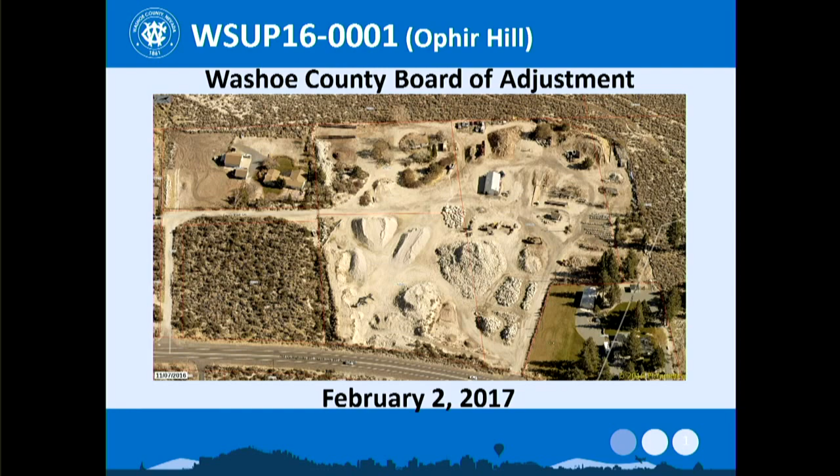It's all of that disturbed area you see there and the piles of rock. Zooming out, here's the vicinity map for the area. It's in the northwestern portion of Washoe Valley, right off of old Highway US 395.

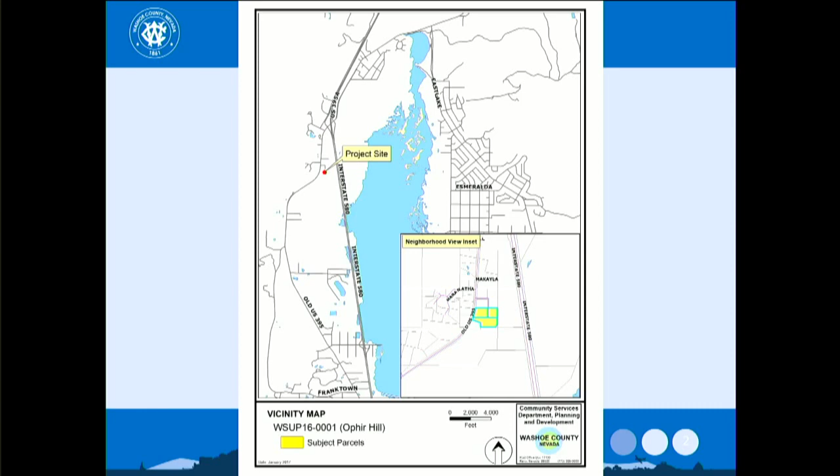For background, the subject site consists of 3 parcels totaling 11.35 acres, all of which has been disturbed. The property is zoned high-density rural and has a master plan designation of rural. All of the surrounding immediately adjacent parcels are similarly zoned, except for the large BLM open space parcel to the east, which is general rural. There are single-family residential houses to the northwest and south of the site, and the aforementioned BLM open space to the east.

In 1983, the Slide Mountain landslide deposited approximately 160,000 cubic yards of dirt and rock on the subject parcels. And since that time, for over the past 30 years, the landowners have been clearing that debris from the property through removal through commercial sale. Washoe County Code, however, classifies that type of business activity as an aggregate facility, which is an industrial use. The high-density rural regulatory zone does not allow that industrial use.

Due to a recent code complaint about the use, code enforcement took action and investigated. Apparently, there hadn't been a complaint up until this point, and the operation had been going on for some time. After investigating, enforcement staff faced 2 options in trying to bring the site into compliance. They could either demand an immediate cessation of the commercial use, which likely would have resulted in civil lawsuit proceedings, which can go on for quite some time,

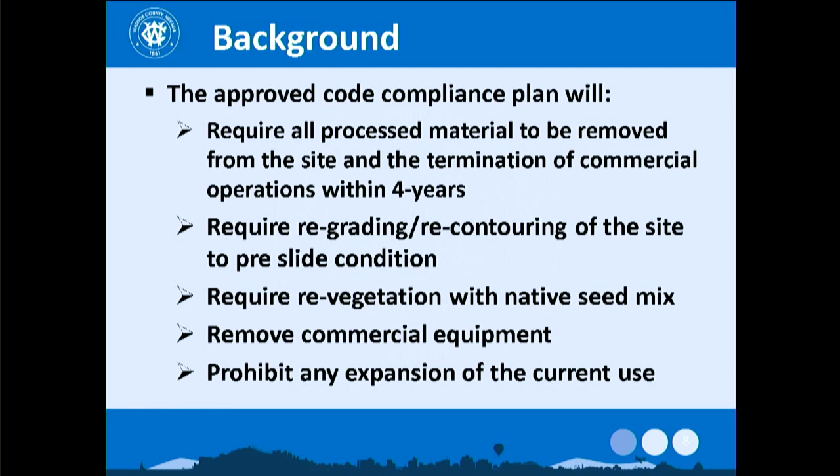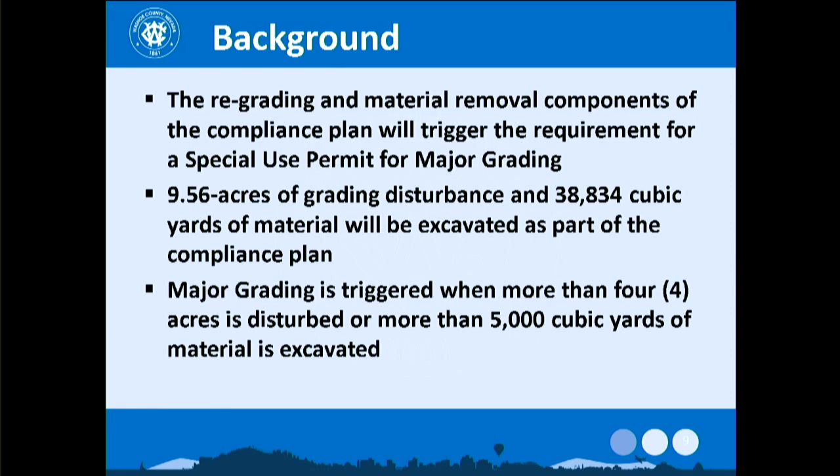So why an SUP? Well, the regrading and material removal components of the compliance plan trigger major grading because there's so much material on site. Approximately 9.56 acres of grading disturbance overall will occur, and obviously it's already been disturbed. As part of the regrading, 38,834 cubic yards of material will be excavated, as well as portions removed. Major grading is triggered when more than 4 acres is disturbed or more than 5,000 cubic yards of material is excavated, so it's well beyond those thresholds.

So just to be clear, wrapping up the background section, what the BOA is being asked to do on this item: you're being asked to approve a special use permit for major grading and approve the associated code compliance plan, which is actually going to be part of the conditions of approval to the SUP. So the plan, so to speak, are actually going to be conditions of approval to the SUP. The BOA is not being asked to approve the aggregate facility use, which is illegal. You're being asked to approve a plan to terminate that existing use through a phased compliance plan.

Here's the current condition of the site with the material estimates, just to give you an idea of the range of material that exists and will need to be removed or regraded, ranging from the small 12-inch rock and sand that they have sorted there all the way up to the 36-inch and larger diameter boulders.

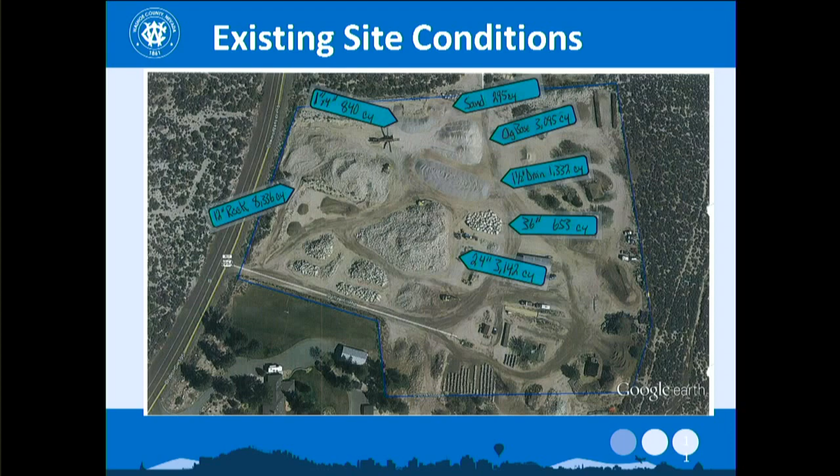So the restoration plan would essentially rebalance materials on the site and create a gradual downsloping from the highway going east across the 11-acre site. About a 30-foot elevation difference from the highway to the far eastern edge of the site, and then the large boulders will be removed through the continuing commercial operation.

Any questions so far on that site plan? Okay.

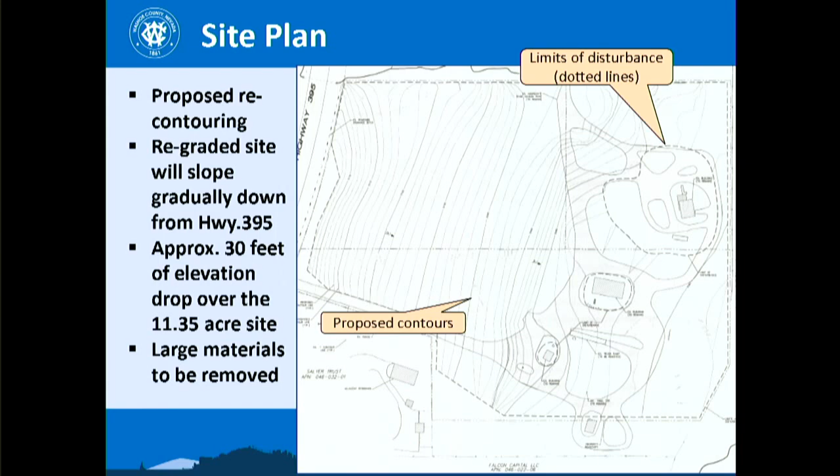As I mentioned, the conditions of approval will constitute the actual compliance plan. But the conditions of approval, as with any special use permit, will also address some fairly typical operational parameters. On a use like this, operations we generally try to limit to daylight hours, so that's going to be a condition of approval proposed by staff. No starting earlier than 6 a.m. with machinery and removal of rock. There has been crushing of rock, it's my understanding, or sorting in the past. We would like a condition prohibiting that crushing of rock as incompatible with surrounding residential use.

No subsurface or pit mining. The applicant says they don't intend to do that anyway. As I mentioned, no expansion of operations, but we're going to put that in as a condition, and then the revegetation.

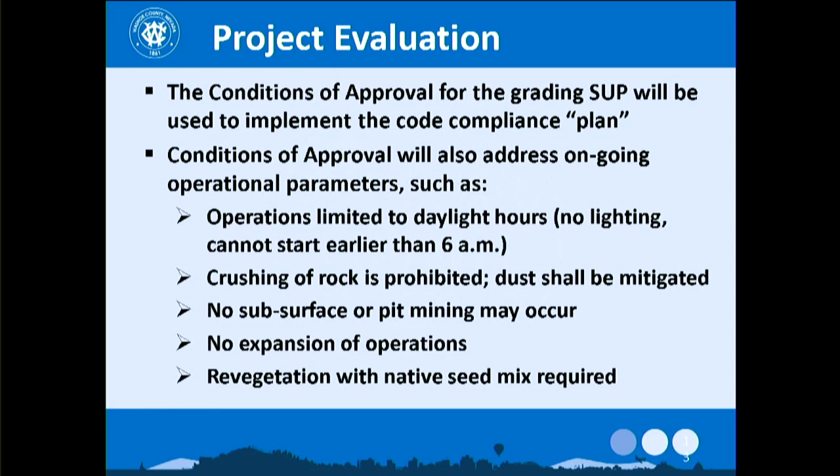A condition of approval is included that specifically states no extension of the 4-year deadline will be allowed. We don't want to get to the end of this process and have it keep getting strung out over and over again. So if we get to the end of that 4-year time frame and we haven't achieved compliance, then of course legal action will have to occur after that.

The regrading plan will actually be an ongoing process. So as materials are being removed, they will then start the regrading process at that particular location. Staff has already received the grading plans. They can be approved once, if and when this SUP is approved, then that grading permit will then be signed off on. Only materials currently present on the site will be part of this.

We wanted to make sure there's a condition in there so that the owner can't bring in materials from another site and store them and then move them. So that'll be another condition of approval. And then lastly, material loads will need to be tarped and treated for dust or loose material. That's standard practice with aggregate operations.

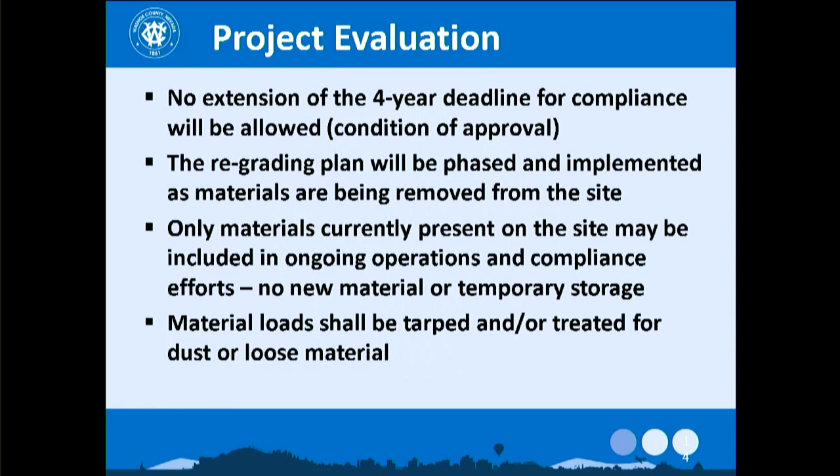Here are all the reviewing agencies staff sent the application to. We are erring on the side of caution here. This is more agencies than we normally send applications to.

Only 3 out of those 13 reviewing agencies requested conditions of approval, and they are listed there: Planning and Development, Engineering, and Health District. It's attached as Condition A, or Exhibit A, to the staff report.

The Incline Village Citizen Advisory Board does not meet during the winter, so the item did not go before them, though they were provided a copy of the application. Staff did not receive any comments from CAB members, but did receive one comment from a West Washoe Valley property owner stating that no extension of the 4-year compliance timeframe should be allowed. Staff responded that it's already a condition of approval, included as condition F2.

Here are the properties that were noticed. The 500 feet did not result in the minimum required 30 parcels, so staff went beyond that 500 feet and tried to select parcels that had houses on them in lieu of vacant property, and you see the extent of the noticing there.

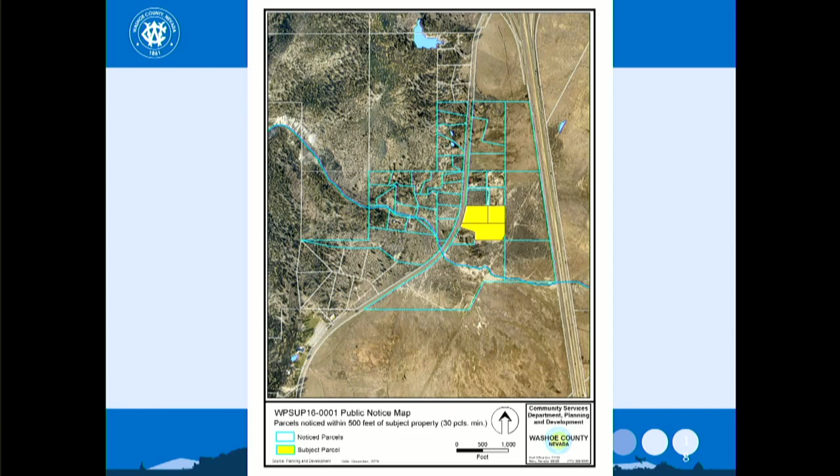The board is required to make certain findings for the approval of special use permits. They're listed there: consistency with the master plan, adequate improvements, site suitability, that it's not detrimental, and effect on a military installation. Analysis of the findings is provided in the staff report starting on page 11, and staff feels all of the findings can be made.

Staff recommendation is for approval with conditions, and here's a motion for consideration. That'll open up to any questions.

Thank you, Mr. Giesinger. I still have to get used to these mics, they're a little different. Anyone have any questions for Mr. Giesinger from the board? Well, he's up there. Nothing, okay. Thank you, Mr. Giesinger. Does the applicant wish to speak?

Good afternoon, my name is Linda Burdick. My husband and I are the owners of these parcels, and I would like to share with you a short PowerPoint presentation that will illustrate the conditions before, and hopefully we can remediate that.

Maybe, help. Chad, can you see if you can give her a hand figuring out what's going on there? There we go, okay, no that's not me, not on the front, wrong one. Just a minute, she has to bring up the right PowerPoint, and then when you do that she'll be able to click the device, so just give her a moment. Staff's actually doing it right there, just a moment. Oh, gotta load it, yeah just wait. Don't let me get too anxious. I apologize if any of you had to live through this horrible event, and it's reminding you of it again. It was quite an event. None of you look old enough to have lived through it, however. 1983? That wasn't a joke at all.

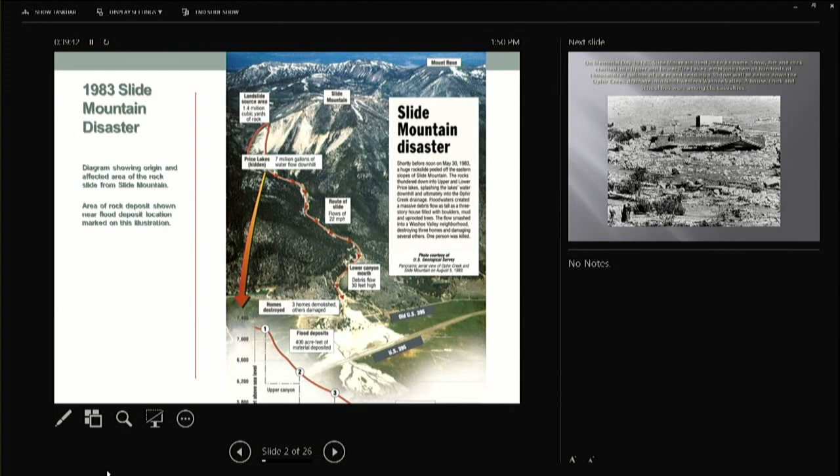This is basically my cover, an overview of the slide where it initiated up at the top of Slide Mountain. I have a little pointer here. The property in question is right down here at the bottom, where the majority of the material actually ended up on our parcels.

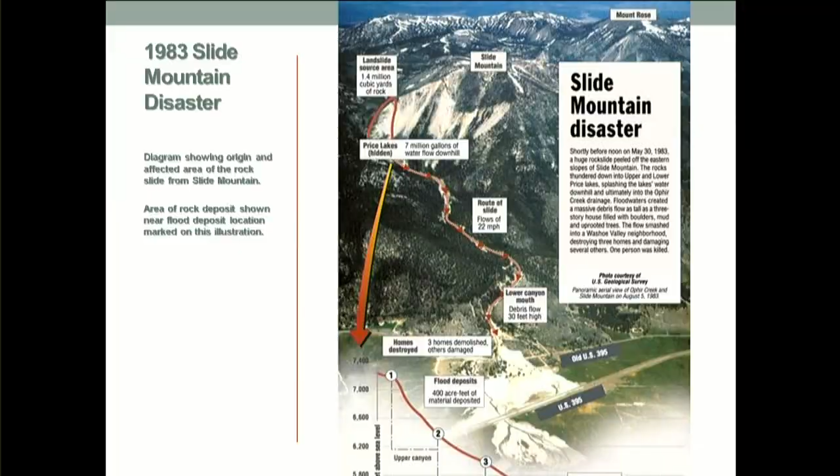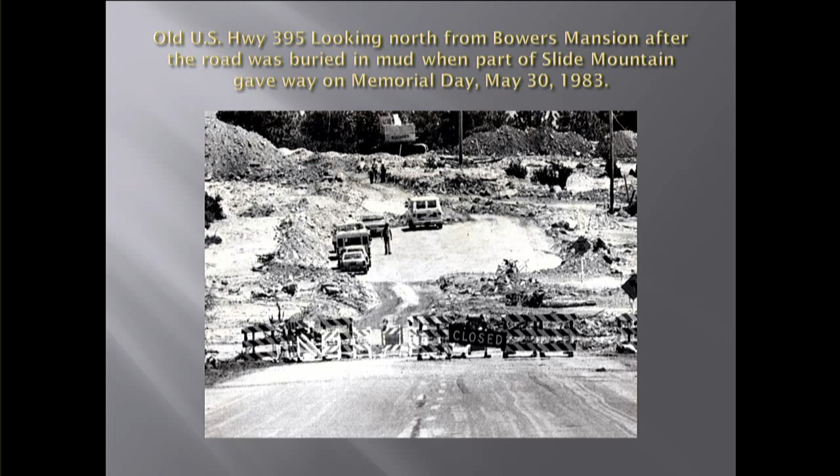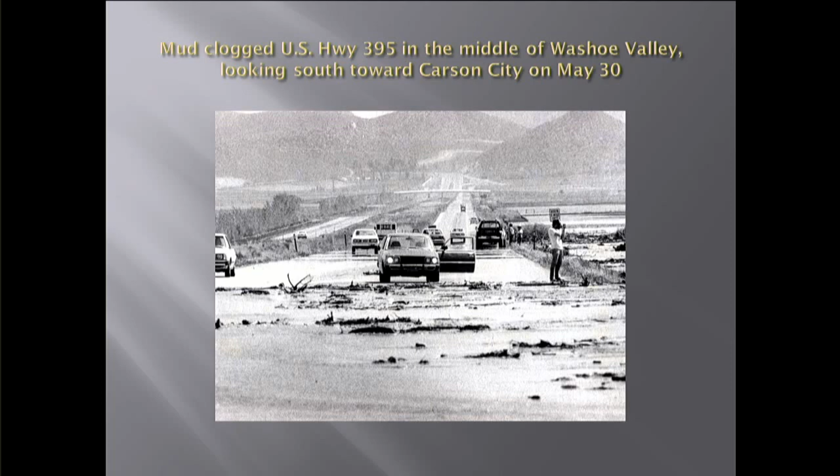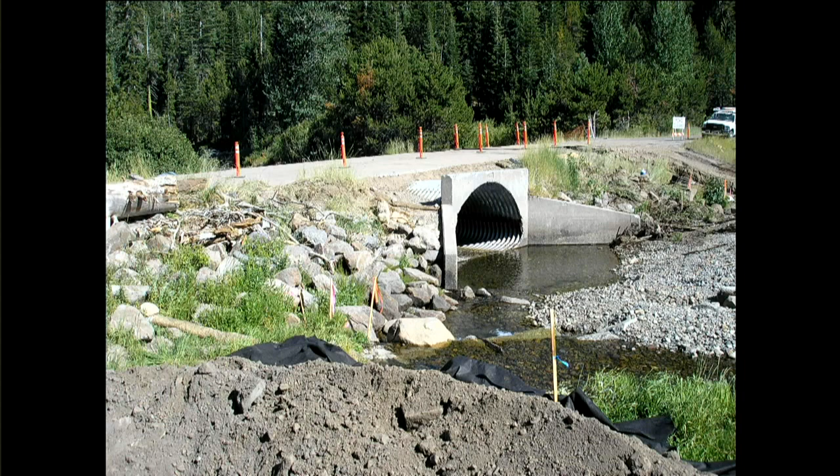And the product has been utilized very effectively with the TRPA in the Tahoe Basin. Last fall, they gave out 9 awards for excellence with environmental projects in the Tahoe Basin, and we got 4 of them. So the rock is being well used for environmental purposes. And I thank you very much for watching.

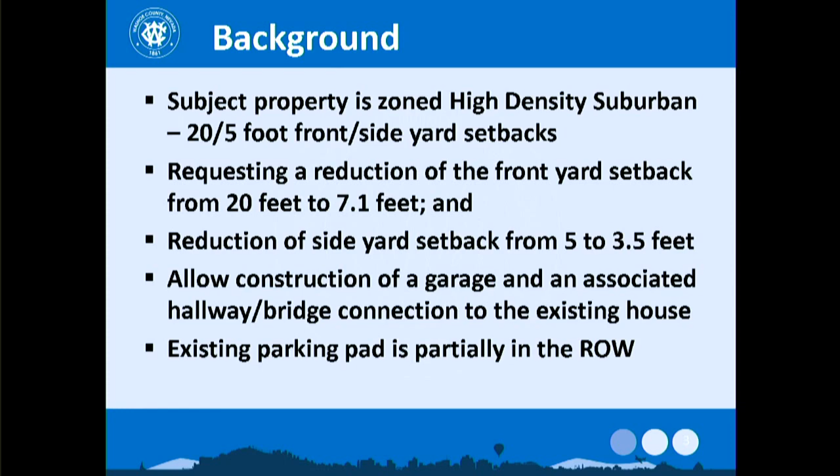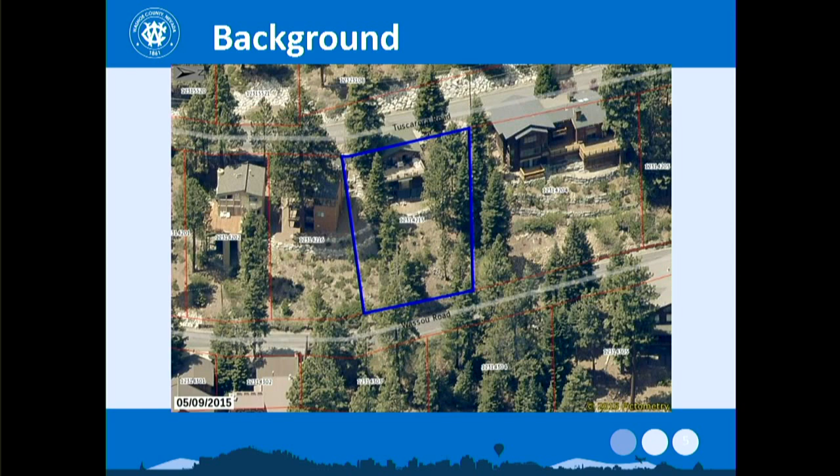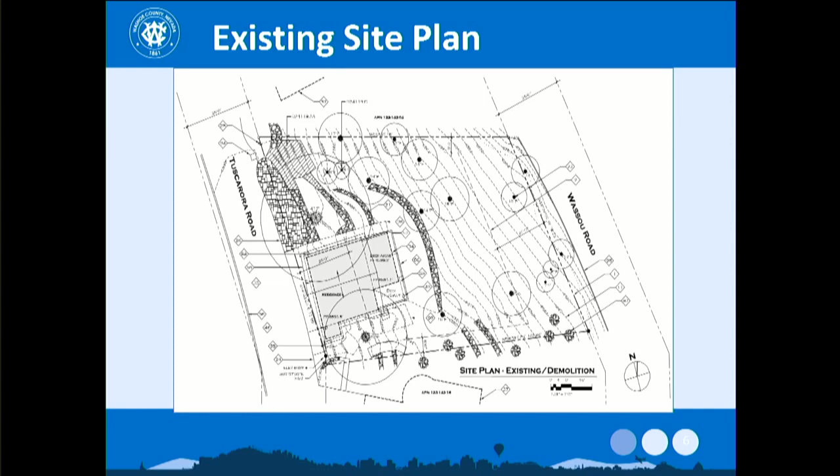This is the existing site plan showing the house footprint, and you can see the pavers there, how they encroach into Tuscarora Road a little ways, and then those rockery walls.

And this is the plan to add the garage. The red outline is the actual setback envelope, and the yellow line is the existing house, which is already within the front yard setback and very close to the road. The brown outline is the proposed garage addition.

And then you may see there, in between the garage and the house, there's a very large diameter pine tree, over 43 inches in diameter, which they're trying to maintain and build around.

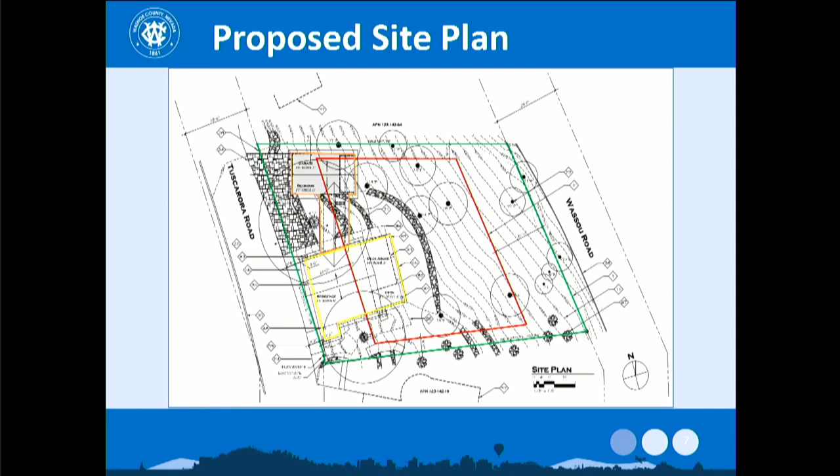Here's elevations of what the finished construction would look like. There's the aforementioned tree and the garage, and then the hallway connection. On the bottom is the back elevation.

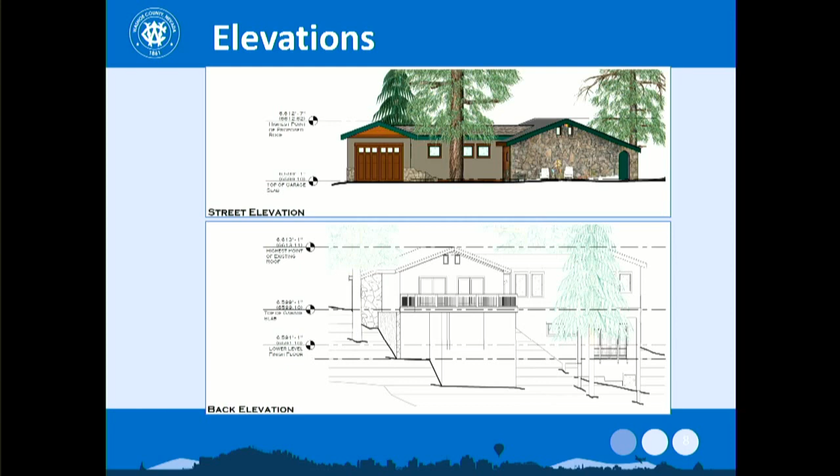Here's your side elevations. You can see the nature of the slope there and the step-down building approach.

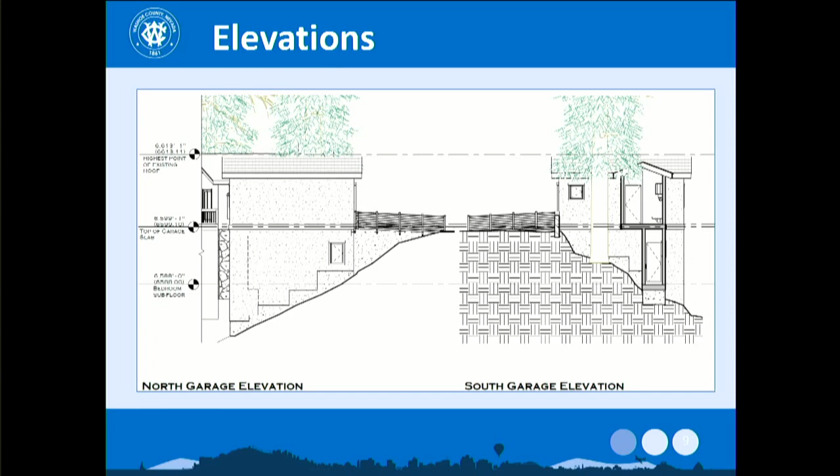In terms of the surrounding parcels, this one is actually a little bit wider than some of the ones further down Tuscarora, so it isn't exceptionally narrow, but it is extremely steep, as you were seeing in some of those elevations and in the pictures.

As I mentioned, the existing residence, built in 1966, is already well within the front yard setback, approximately 2 feet from the property line at its closest point. There is no garage. Obviously, on-street parking is very limited along Tuscarora, especially now with all the snow.

And most of the houses on this street, especially on the downsloping side, are built within the front yard setback up to street level.

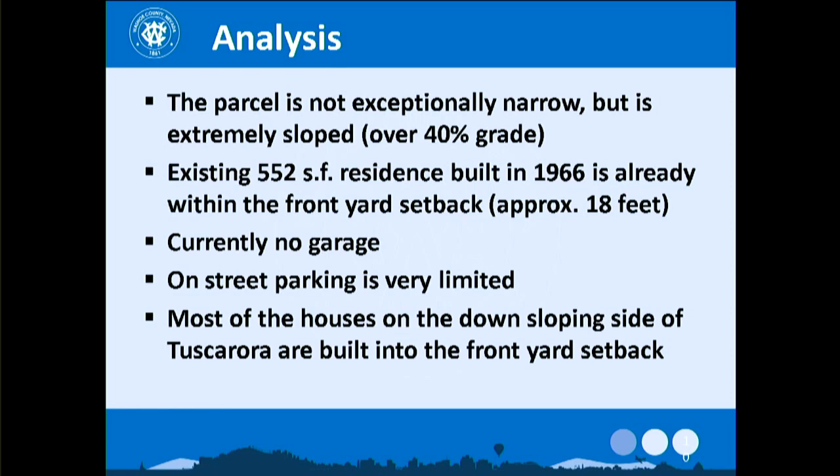Staff feels special circumstances do exist on this site due to the topography and some very large trees.

Staff feels approval would not represent a detriment to the public good. Upslope property views would actually be a little bit better with this design than if they met the 20-foot setback, since they'd have to build farther back down the hill. And of course, it would also provide additional off-street parking were it approved.

Staff feels there's no grant of special privileges. As mentioned, there are similar adjacent properties with setback relief up and down Tuscarora, as well as the existing house inside the setback. The proposed use is an authorized use, as an accessory to the main dwelling. And a military installation is not affected, so it's not mentioned here.

Here are the reviewing agencies staff sent the application to, the standard agencies for Tahoe. 3 out of 7 agencies responded: planning and development with conditions of approval, land development, and engineering. Those conditions are contained in Exhibit A of your staff report.

I want to apologize, during my last presentation I got my cases mixed up. As Mr. Stanley mentioned, yes, the Southwest Truckee Meadows CAB did review the previous application and approved it unanimously. This application, Incline Village, Crystal Bay CAB, does not meet in the winter, so they did not review it, and I did not receive any comments from the CAB.

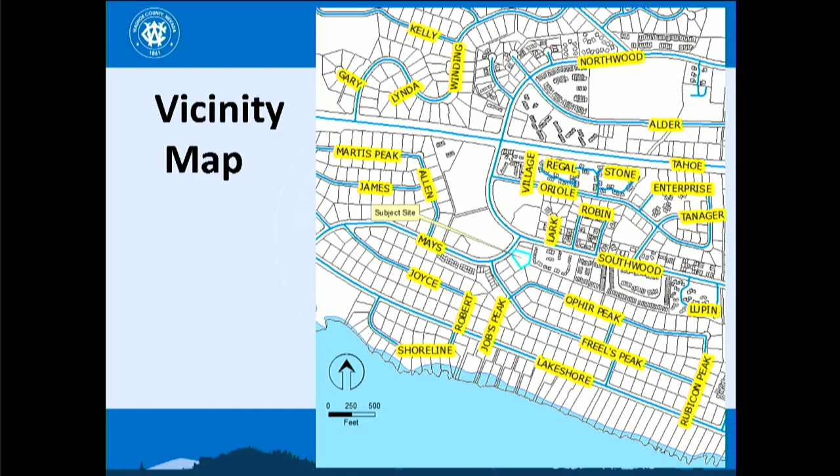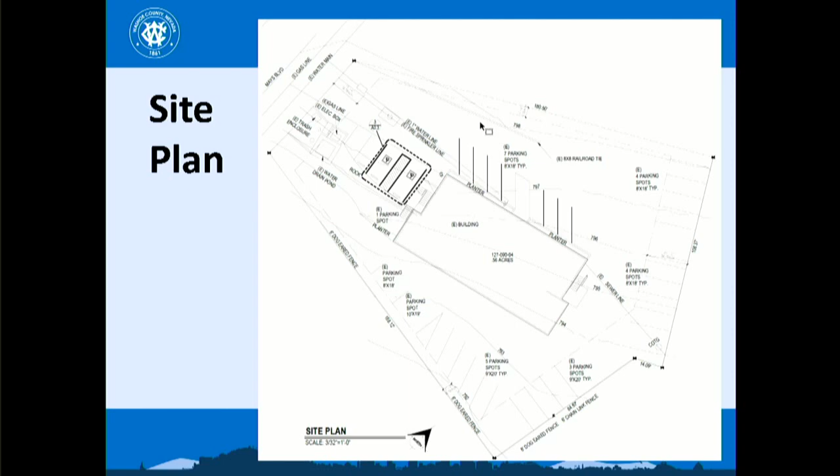This is located on Mays in the Incline Village area, as can be seen on the vicinity map here. Next slide, please. This is a site plan showing the existing configuration of the building on the parcel itself with the surrounding parking. Next slide, please.

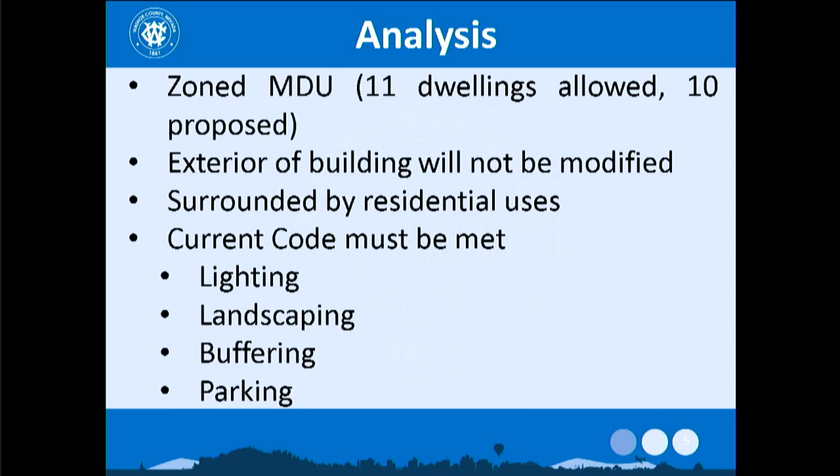The use is an allowed one. This is in the medium density urban zone, which is actually, generally speaking, a residential zone. The exterior of the building will remain more or less as it is. It is surrounded essentially by other residential uses. So really this is a pretty simple one, and I think all of my comments and analysis can be summed up in: okay, meet code. Because this is a change, current code will come into play for things like screening around it, lighting, landscaping, covered parking for those apartments. But really there's not a whole lot else there.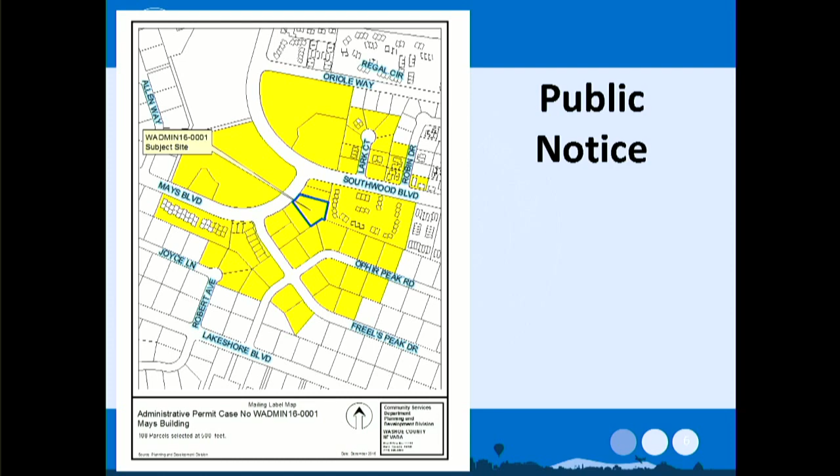Next slide, please. This was noticed to the surrounding property owners as shown on the public notice map here. Next slide, please. And again, the conditions are really minimal, and an approval would then require a set of building permits, and those building permits would be reviewed for compliance with all of the current applicable codes. Next slide, please.

As far as the findings go, is the proposed use consistent? Yes. Apartments are allowed in the medium-density urban zone. Next slide, please.

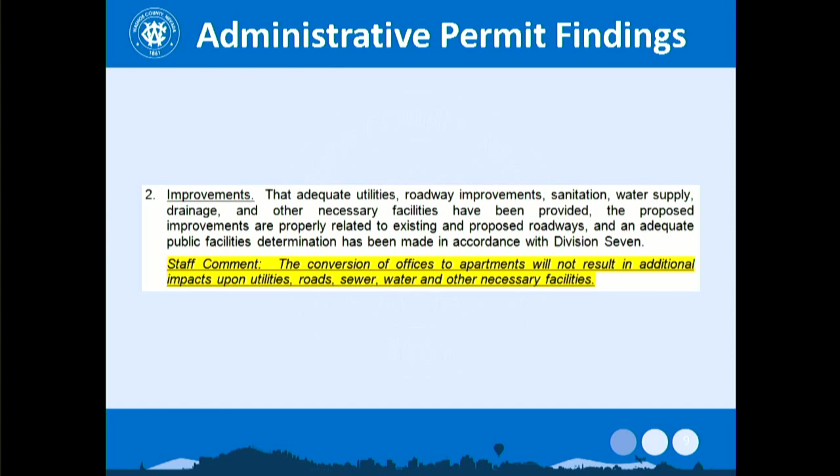The conversion from commercial offices to residential apartments will not create additional impacts. If anything, the overall impact would be a little less. The site is suitable because the building is already there, parking is already there, and upgrades will be made to meet current code.

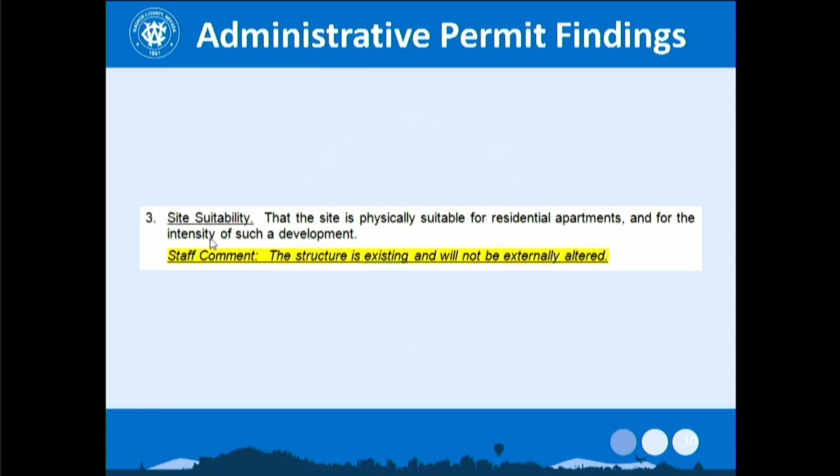Regarding the finding of not being detrimental, this was sent out to the appropriate reviewing agencies, and I got virtually no comment back from any of them. And there is no military installation in the vicinity, so this finding does not need to be made.

So, without having much in the way of comments from anyone, I am recommending approval, subject to the conditions. And I hate to sound like a broken record, but they must come up and meet current code when the building permits are applied.

Thank you, Mr. Pelham. Does anyone have any questions for Roger? Seeing none, thank you. Madam Secretary, does the applicant wish to speak? Yes, sir.

Mr. Chair, members of the board, Tim Carlson for the record. I'm the owner of the property, and we concur with staff. We'll do everything appropriately assigned to us regarding the permits and so forth, and do it according to code. I have no other further comments unless there are questions.

Thank you. Does anyone have any questions? Seeing none, thank you. Madam Secretary, do we have any public comment? Yes, we do. Kathy Brandhorst. My name is Kathy Brandhorst, and I am the United States President.

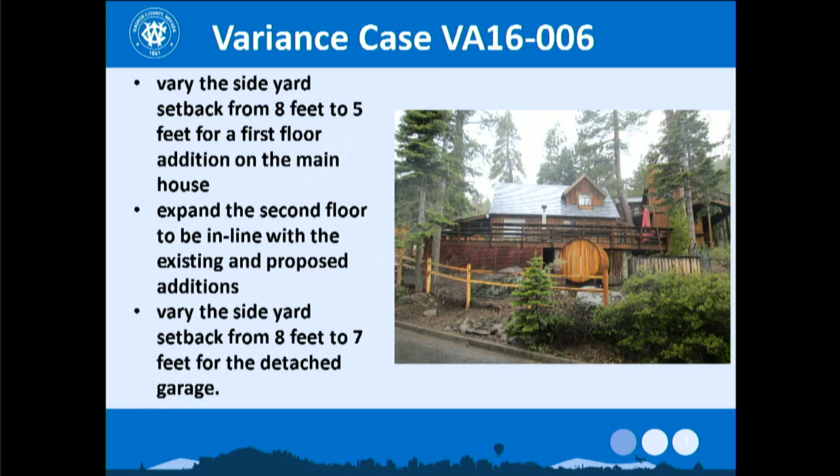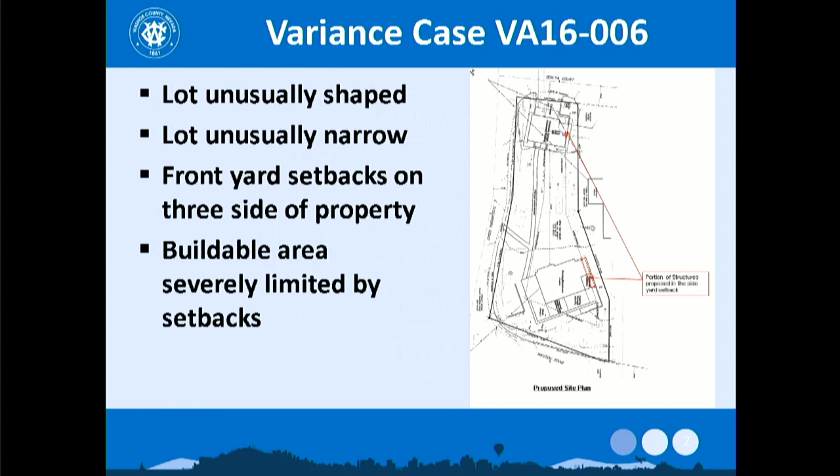Okay, so the conditions of the lot haven't changed. It is an unusual shaped lot, a very narrow lot. It has 3 front yard setbacks, and that severely limits the buildable area of this property. This is not a tear down rebuild or a major overhaul, it's a matter of modifying the small cabin a little bit to make it a little bit more livable.

So in 1999, they actually had a variance to reduce the side yard from 8 feet to 5 feet so they could put a standard size bathroom on it.

The cabin only had this little bitty bathroom. That's a picture of it there. I equate it to something you would find on an airline. It's really small and cozy, let's put it that way.

So they did in 1999 add a standard size bathroom. Standard size means 8'11" by 6'6" on the outside walls, so approximately a 9x6 bathroom. It's still pretty small. The second bathroom they want to add would be about the same size, but then they would take out this little tiny bathroom and actually have a little more room in the kitchen, which would be nice.

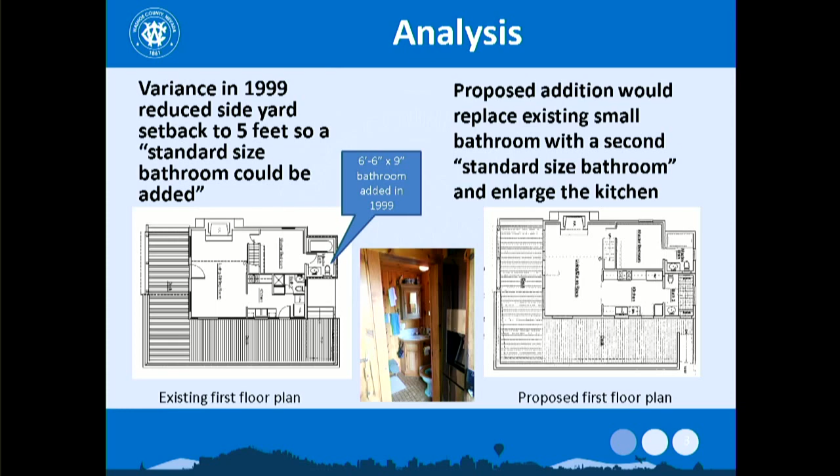Oops, got my buttons backwards. Okay, this is the existing elevation on the right side, and you can see that little bump out on the side of the house. That was the addition they put on in 1999. They want to now put an addition on the first floor that would be even with that, and then extend the second floor out to be even with the first floor with the additions on it.

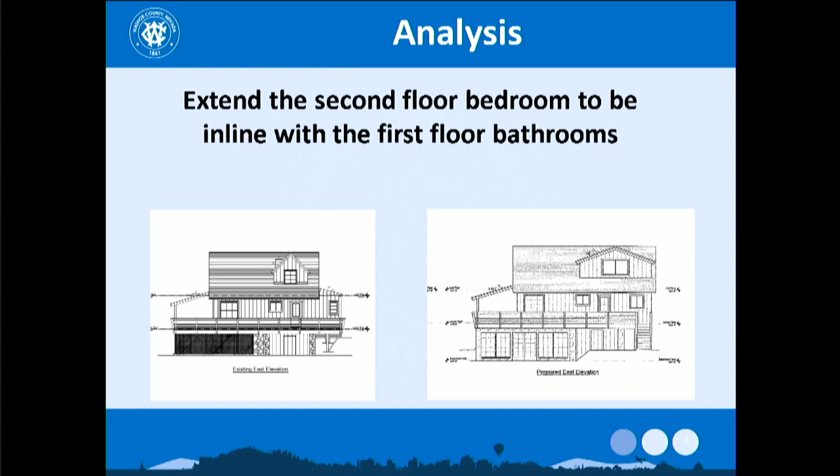Basically, by code, the side yard setback starts at the rear of the front yard setback. So I was trying to figure out how to word this, and it really is confusing when you just say it. That's why I had to make a picture.

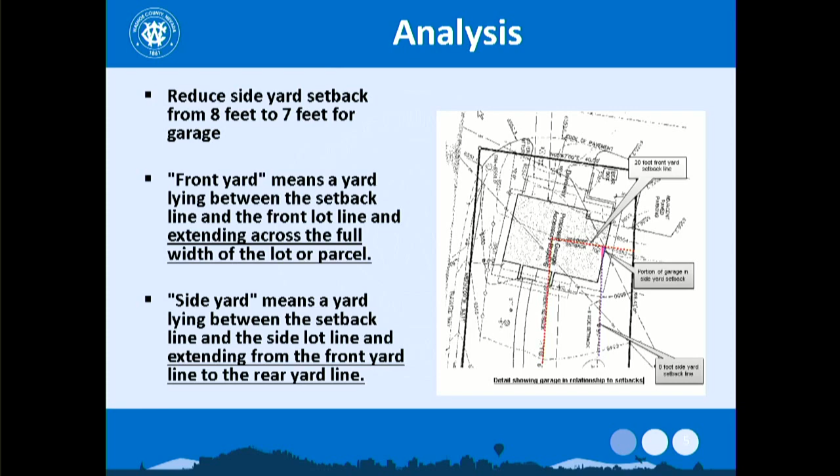Okay, so the conditions of approval are still the same. The substantial conformance, and there will be a hold harmless on the house as well as the garage, because the house is also in the front yard setbacks. The porch is already there in the front yard setback, but we want to record that, so if there's any damage on it. There's also a condition that if more than 50% of the cabin is torn down for remodel, they can't then go back and say we're going to build this new house on top of the old footprint. That would have to look at the existing setbacks on it.

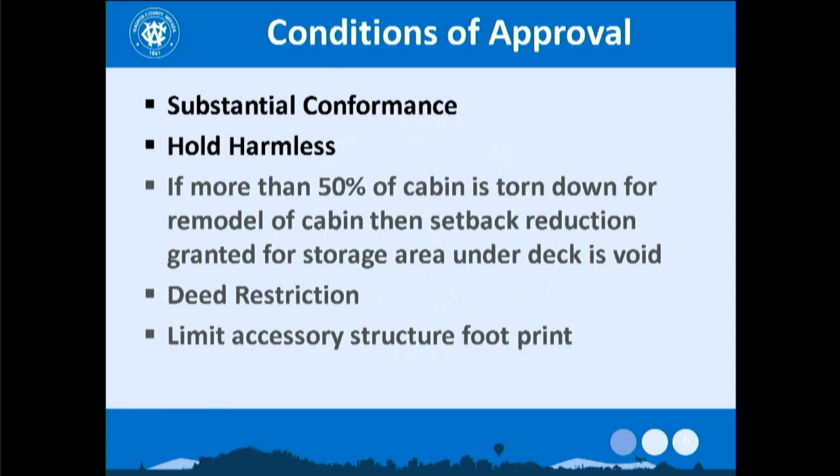What we're trying to do here is prevent them from using this variance to build a big house later in the future. The other conditions are mostly for the garage, the deed restriction and the limited accessory structure footprint. So that's already been approved.

And the findings are the same. The lot is exceptionally odd shaped, and it's odd size with steep slopes. There is no detriment once we have all the conditions of approval met. That's what those are there for, to mitigate any potential detriment.

There's no special privileges. There have been so many variances granted up in this area. This is very similar to a lot of other properties, and it does fit the neighborhood and the conditions for what's up there. And of course, all the uses proposed on this property are allowed in the medium-density suburban area.

So, I guess that's it. I thought I had another slide. No, I should have... I thought I had a motion slide on there. Wait, no, I'm stuck. I think that there is a motion. Oops, oh, yeah, there's a motion.

So the motion this time, I'm going to let you look at it on the slide, is basically we're approving the variance for the side yard setback from 8 feet to 5 feet for the first floor addition on the main house, to expand the second floor to be in line with the existing and proposed additions, and to reduce the side yard setback from 8 feet to 7 feet. If you have any questions, I'm happy to answer them.

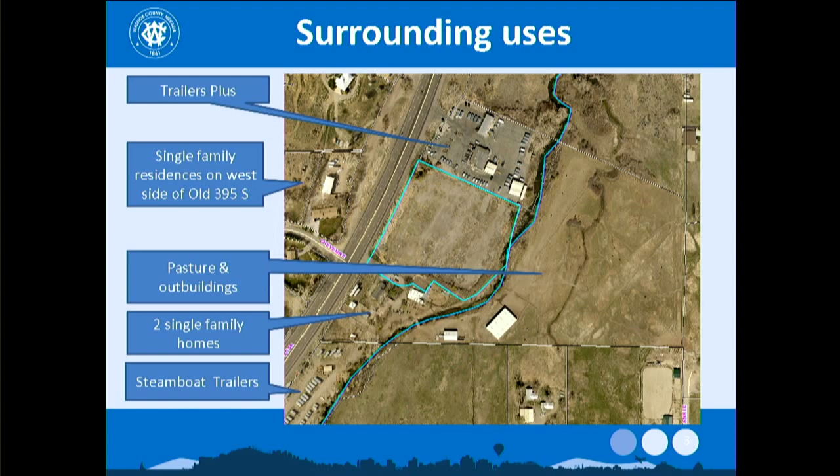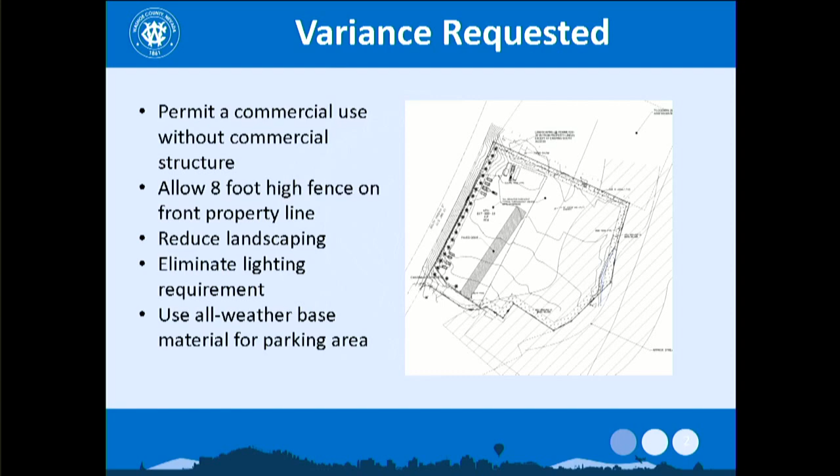So this is the site plan that they're proposing. The rear half of the property is in a sensitive stream zone; they're not proposing to develop any of that. The front half of the property along the highway is lower than the highway by about 6 feet, so if you put landscaping along the front of the property, nobody's going to see any of it except the trees. They are proposing to still put in the street trees.

I haven't got my arrows down yet. The rear of the property is in the sensitive stream zone, but the whole property is in the 100-year floodplain. I was working at REOC during the storm, so I didn't get a chance to drive down there and take pictures of it. I'm suspecting it was underwater. So the site is several feet lower than the road.

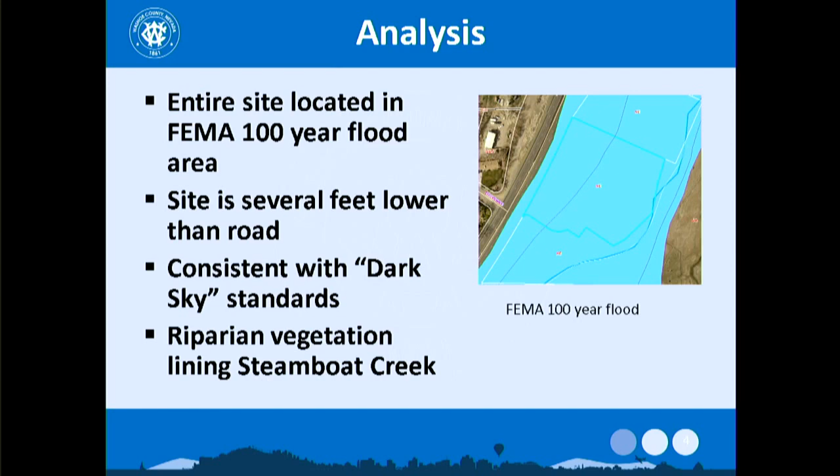Their request to eliminate lighting is consistent with dark sky standards, which are requested or desired in this area. Steamboat Creek in the rear has a lot of riparian vegetation lining the stream, so they don't want to disturb that, but they also don't want to add more landscaping in that area. We sent it out to a lot of different agencies; the 3 agencies that responded were, of course, planning and development. The conditions of approval we're looking at include limiting the use just to outdoor storage of operable vehicles, RVs, and related apparatus only.

The operational conditions include that they're not going to have any sales off this lot. They're not going to have any employees on this lot. It's not going to be used for storing other things.

And with their requests for landscaping, the one thing I did require is that they do some landscaping between the RV lot and the residential properties to the south for screening purposes.

Truckee Meadows Fire Department had no problem with it. They do want defensible space, water for fire suppression, and a safe access that meets their fire codes. So the base material will meet their fire codes.

Nevada Department of Transportation stated that the access to that site is privately owned. Once it's transferred, they need to get a new encroachment permit for their use, and they can't put signs in the right-of-way. I actually put conditions on here that they aren't going to have any signs on that lot except for the basic security, address, and things that are legal as not requiring a permit. So there's not going to be a big Sierra RV sign on this property.

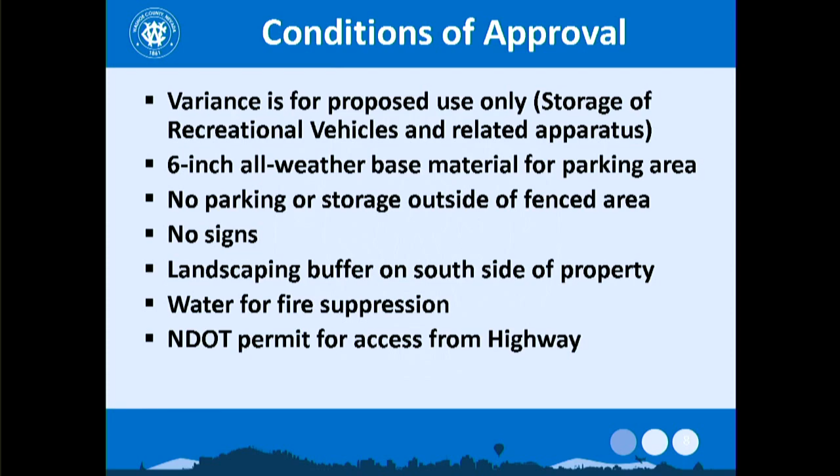Again, there's no parking or storage outside of the fenced area, no signs, landscaping buffer on the south, and water for fire suppression will be required, as well as the NDOT permit. So therefore, I am recommending approval, and if you have any questions, I'm happy to answer them.

And there is a representative here for it too. Thank you, Ms. Kraus. Anyone have any questions for Ms. Kraus? Yes, sir, Mr. Thomas.

Real quick, the 8-foot fence faces the street, and then the other fences will be 6 foot, is that correct? No, it's 8 feet all around. Under code, a commercial property can have an 8-foot fence except along the street. Okay, so it's going to be 8 feet all around instead of 6 feet on the street side.

And that's an electric fence, that's correct? It is an electric fence, so of course one of the signs will have to say that. That's the type of sign I'm saying they can have - this is an electric fence, don't touch, whatever they put up on those things.

Thank you. Anyone else? Is the applicant here and wish to speak? Good afternoon, my name is Michelle Rambo. I'm with Rubicon Design Group, representing Sierra RV. Eva did a really good job of covering the issues for you, so I will just be available to answer any questions.

Thank you. Anyone have any questions of the applicant? Yes, sir, Mr. Thomas. I just find it amusing that you have an 8-foot electrical fence basically to secure your property, but you don't want any lights there that would shine onto the property. You would think that light would deter any possible criminal activity after the hours of darkness.

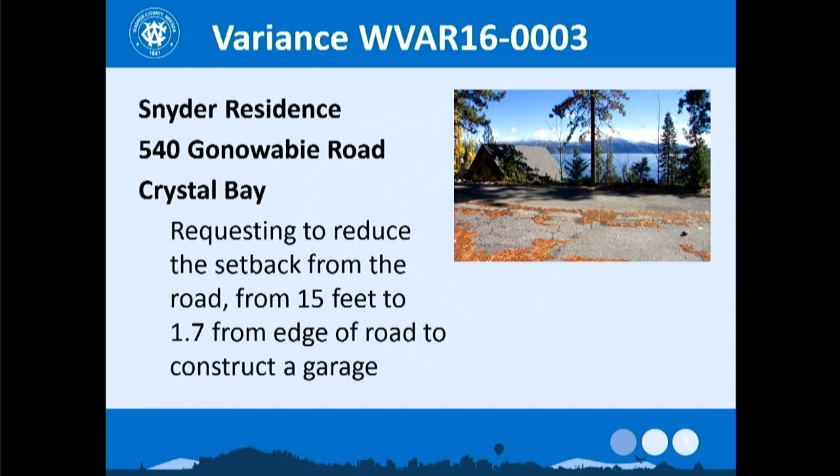I know Ms. Hills is familiar with it. If you haven't been up there, it's a very interesting street to drive down. It's an old street, an old subdivision, and it has its challenges. So anyhow, the applicant wants to build a garage.

He has a house, an old house, and it does not have a garage on it. So they are proposing to build a new garage, and because of the slope of the hill, it drops off steeply from the edge of the road down the hill, so they want to move the garage close to the road to be able to get access into it.

And the corner of the garage—oops, I'm pushing the wrong buttons, I'm not used to this yet—is proposed to be 1.7 feet from the edge of the road travelway.

Right now, their only parking area is on the uphill side of the road. They've actually dug it out—I don't know if they did or the previous owner did—and widened it, creating a parking area on the side of the road.

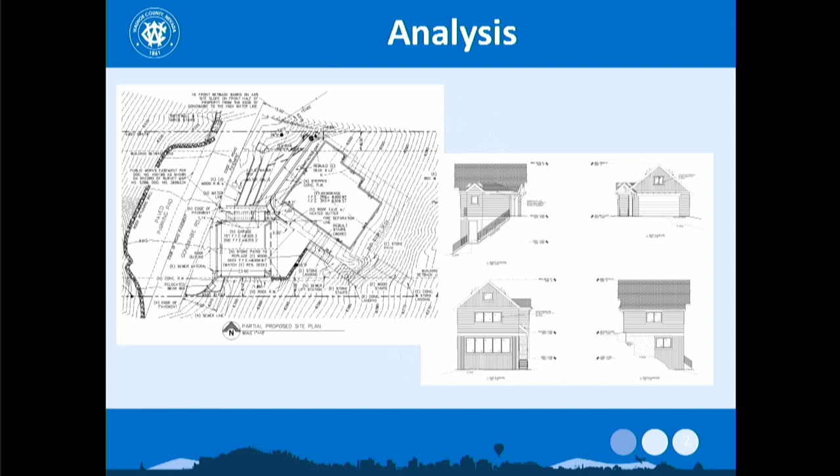So anyhow, this is the site plan. On the left-hand side, at the top of the lot, is State Route 28. And on the right-hand side is Lake Tahoe. They actually own all the way from the highway down to the lake, and the road goes right through the middle of their lot. Like I said, this is an old subdivision—they didn't create a right-of-way or an easement when they created it, but that's where the road is.

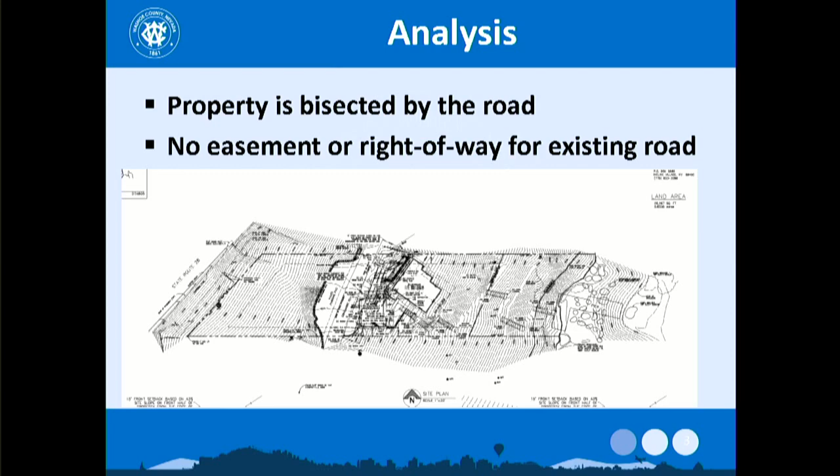We did notify 33 separate property owners in this area, and I have received one letter of support from the neighbor, Stephen Kroll, who lives at 550 Gonowabie. He says he's the next property over, to the north of this property. He is a neighbor, and he is in support.

Again, there were no CAB meetings between November and February, so this did not go to a CAB meeting. The application was sent to the CAB members, and I did not receive any comments from anybody.

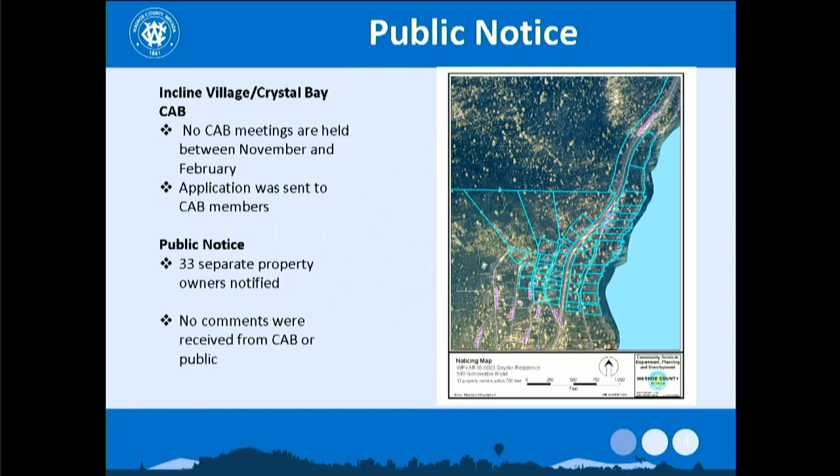Of all the agencies that reviewed it, only planning and engineering had comments or conditions. Land development asked for standard conditions: garage door opener and a hold harmless. Traffic was a little more concerned, and they asked that it be changed from a 1.5 to a 7-foot variance. Because of that recommendation, that is what I'm recommending you approve.

So, conditions of approval for this standard plan. It is a steep lot, very steep, very hard to build on. That basically is the hardship on this property: the slope of the lot and how it was developed. You only have this one little road to get to it, and the road goes right through the middle of these people's property, and they wish to put a garage on next to that.

Back in 2002, the code said you had to set back from a right-of-way if it was county, or set back from the right-of-way or an easement. Since there wasn't an easement here, we changed the code to say, or a road maintained by the county. This is maintained by the county—we plow it, we do the road maintenance on it. That's why this is coming to you for a variance.

In the past, the code didn't say you had to set back from the road or the pavement, it just said you had to set back from a right-of-way or an easement. The neighboring properties have built right up to the edge of the road, so this is unusual—this is the first time I've had a variance for this portion of the road that isn't in a right-of-way or an access easement. So it is kind of a new review.

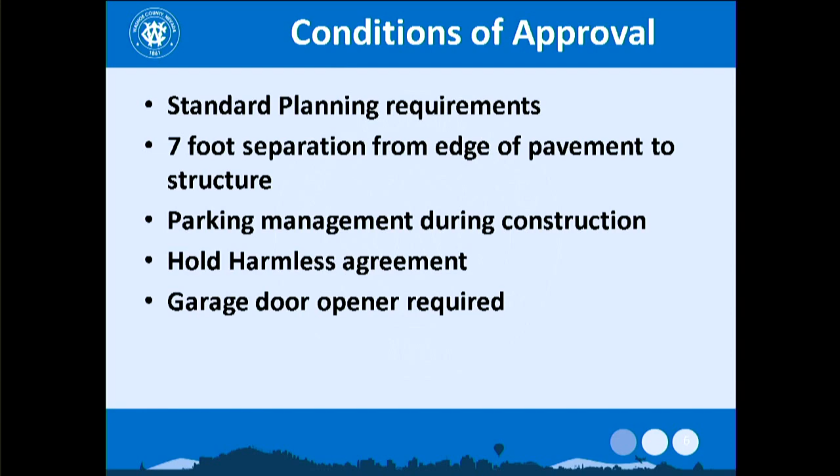...transporting their employees. Again, there's a condition for a hold harmless agreement to protect the county from any damage that might be done by snowplows or other road operations. A garage door opener is required so people don't have to stop in the street, open the garage, and go in. I know it's very common, almost everybody has one nowadays, but we want to make sure that is a condition.

The findings are that there are special circumstances based on the slope of the site and the fact that the road crosses their property—it's on their land. The conditions of approval mitigate the detriments. There are no special privileges; a lot of the properties in this area have variances and setback reductions based on the fact that it is a very steep, hilly area and hard to build in. The proposed garage is an allowed use in MDS.

So, staff is recommending approval. We modified it to be a 7-foot approval. If you have any questions, I'm here to discuss it, and I do know the applicant wants to discuss that too. Thank you, Ms. Kraus.

Anyone have any questions for Ms. Kraus? Seeing no questions for Ms. Kraus, does the applicant wish to speak?

Hello, I'm Elise Fett. I'm the architect engineer, and I live on Gonowabie as well. Could I have an overhead projector, please? Unfortunately, because of the storms that were going on while Eva was trying to prepare the report, she wasn't able to do a site visit. I have taken several pictures that I'd like to run through for you to take a peek at. This is...